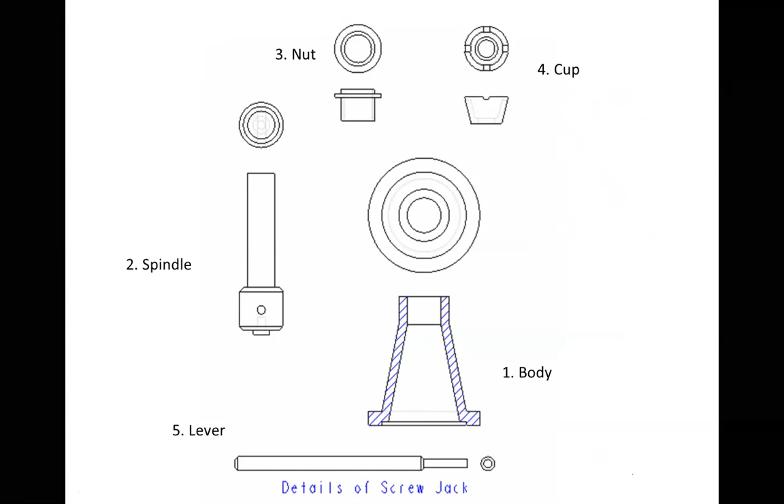So we have to draw the assembly of that. So understanding these parts is first necessary, so that after seeing this drawing we should understand how these parts are. This should come to our mind first.

So you can see here the 3D models of the different parts. This is the sectional view of the body part, a full section is shown. This is the complete screw jack body, in which you can now easily imagine this nut will be fixed here. The collar is here, it will be placed at this position.

After that, in this threaded part, this screw will be fitted. Then above this screw, this cup will be placed and tightened here. And in this hole, this lever will be inserted.

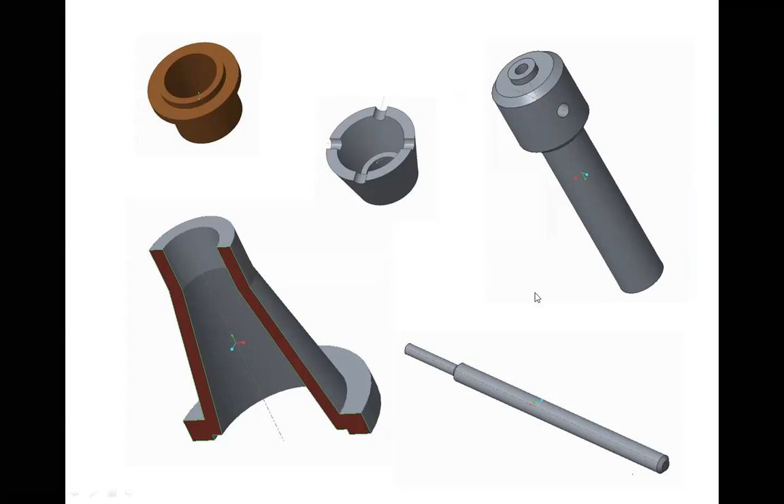Now you can see the fitting, so you can now easily imagine this is the body part. Nut will be fitted here. Inside the nut, the screw, and the cup will be placed at this position. Handle will be at this position. So the idea will be very clear when we talk about the screw jack assembly.

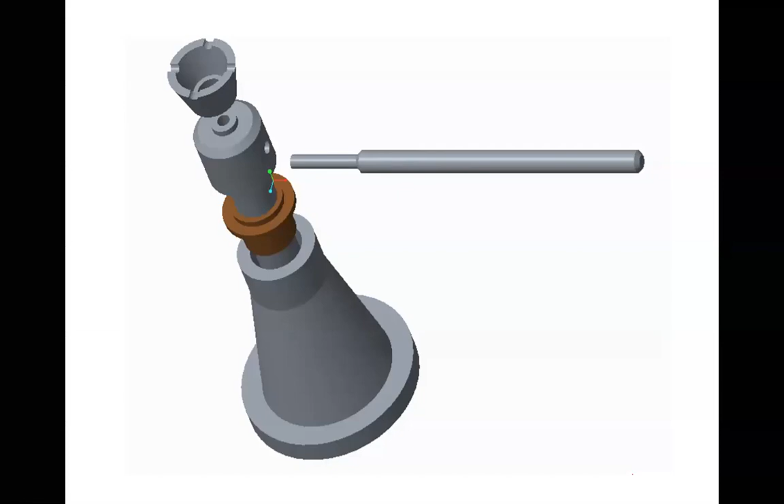So looking at this drawing, we should understand that these parts will get fitted like this - these parts are getting fitted like this. So you can see the screw jack assembly. So this is the assembly of the screw jack. Whatever details are there, they can be visualized, and after that you can have the proper place. This screw can be at any height.

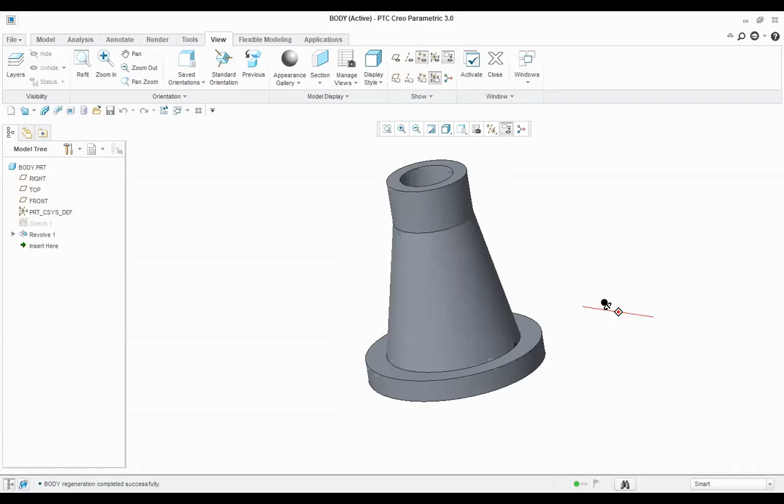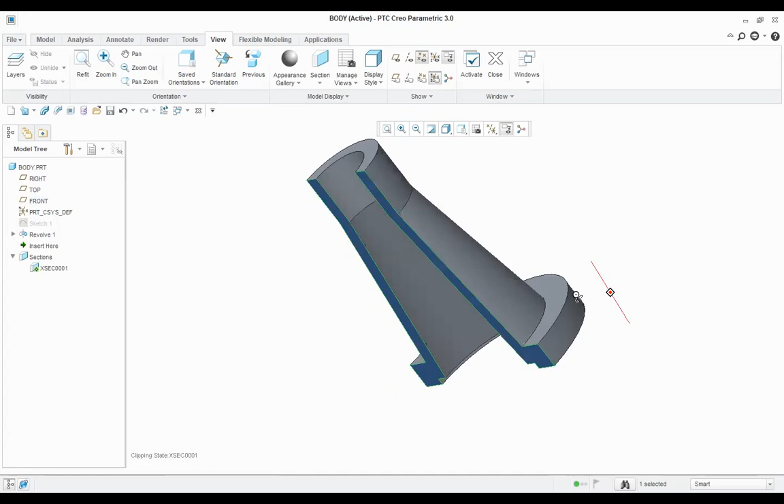This figure explains the 3D model of the body part - a body part, okay, so this is the body part. It's symmetric, and you can have the sectional view of this so that you can see the detail. See how the sectional view looks.

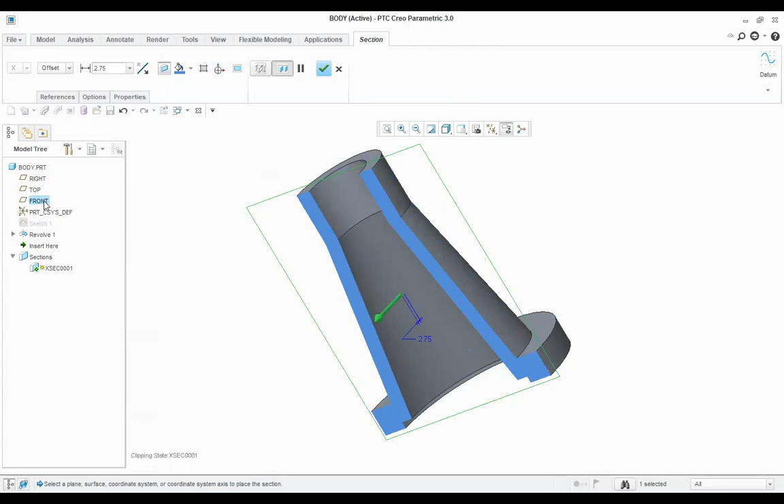And if you don't take the section, what will happen? If the section plane changes, the sectional view also changes. So it all depends on where we are taking the section. If you are using the section, you can have the sectional views; otherwise, you can see completely the detail of this.

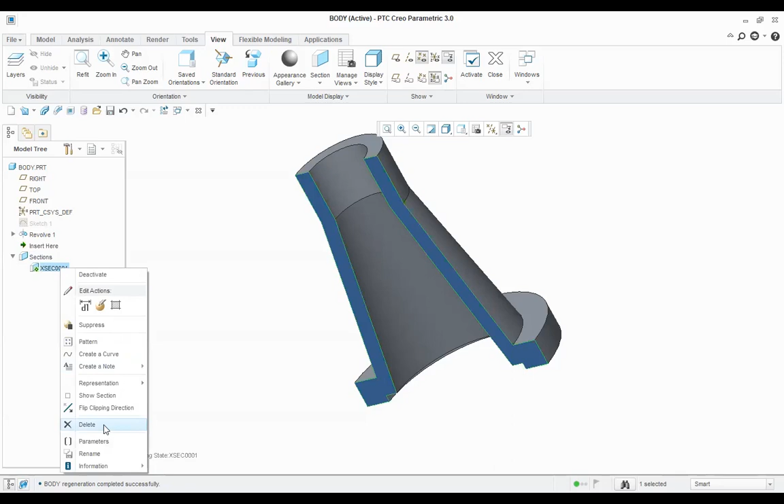So this is the first part. Now the second part is the nut, cup, spindle - any one. So this is the nut part, which is - this is the nut part. This is having internal threads, this is having the internal threads.

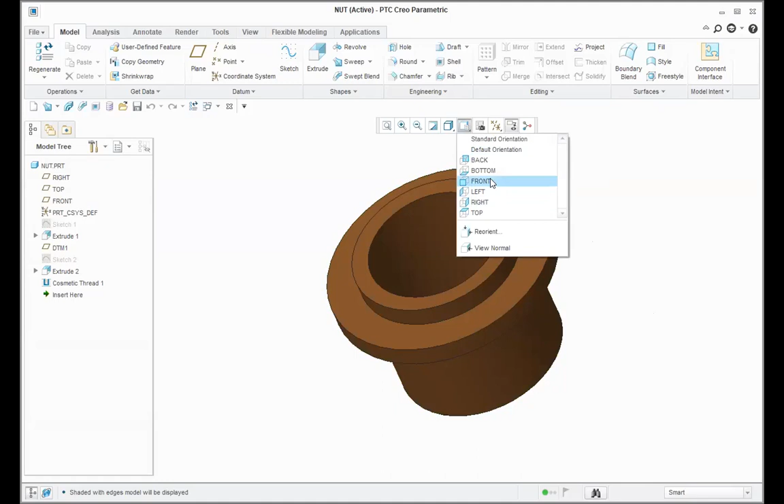Now for this, if you see the front view of this, this is the nut part. And if you have the wireframe drawing, blue line indicates it is a threaded part. And in the top view, you can see the circles - these are the different circles. Very easy to understand. This drawing is given front view and top view.

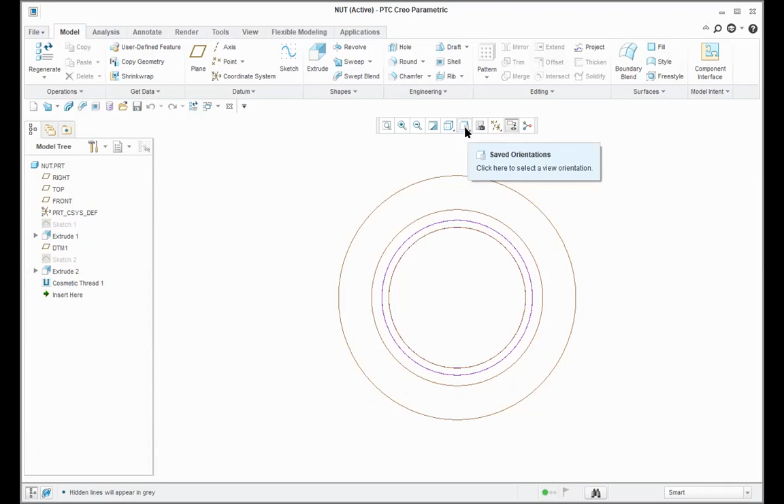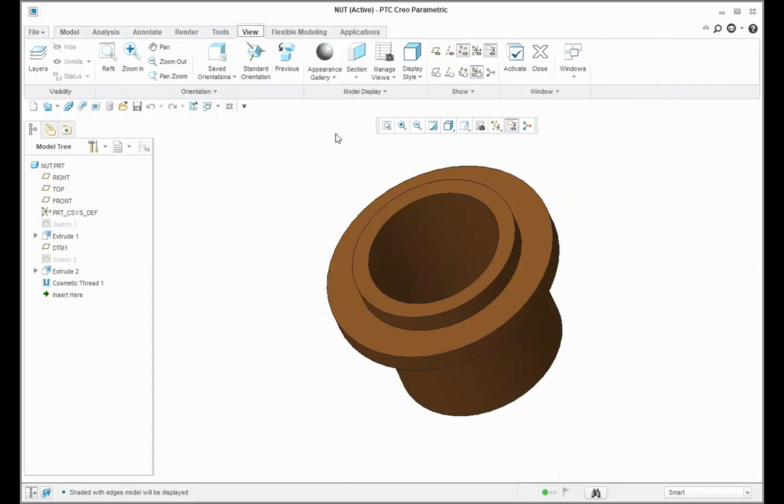This is given to you for the nut. This is the front view. So this is given, so from this you can very well imagine the nut drawing. So this is the nut - internal threads are there, this is having the internal thread. If you try to see this in sectional view, things become very simple. So this is there, the nut can be having this position.

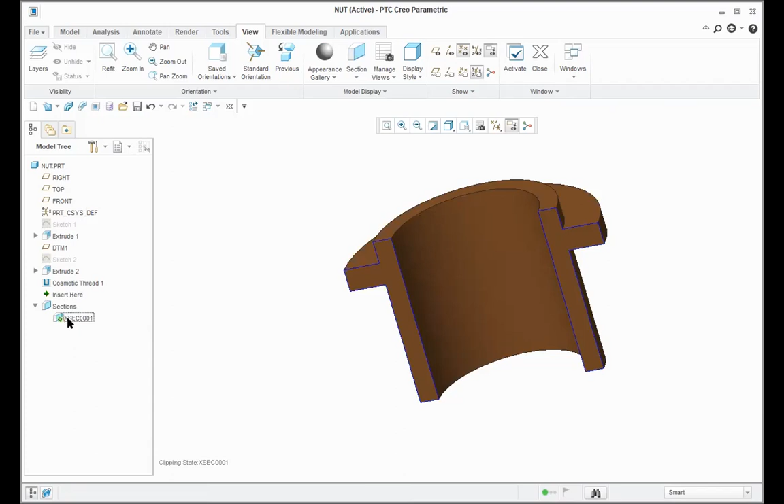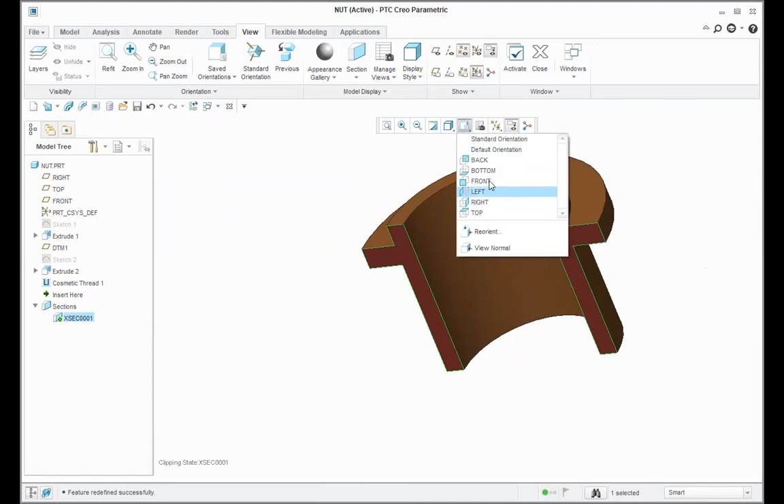You can have the sectional view to understand easily how the sectional view will be working. So it is like this - a very clear concept of sectional view. This nut's sectional view looks like this, see - only this much material gets cut. And you can have the sectional view.

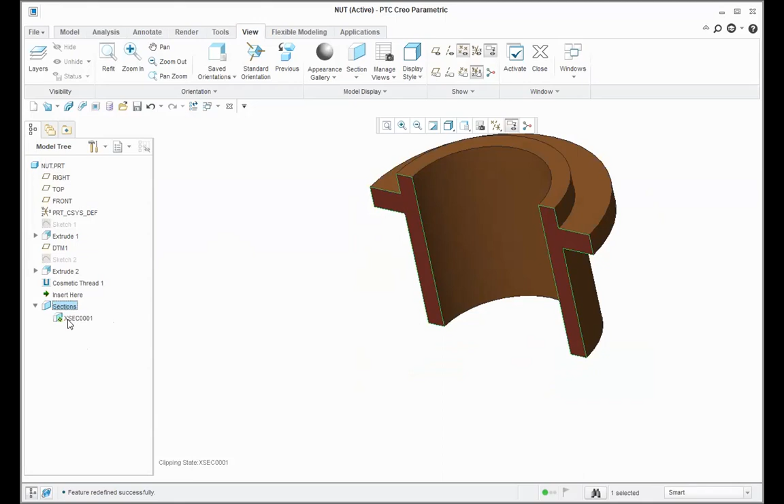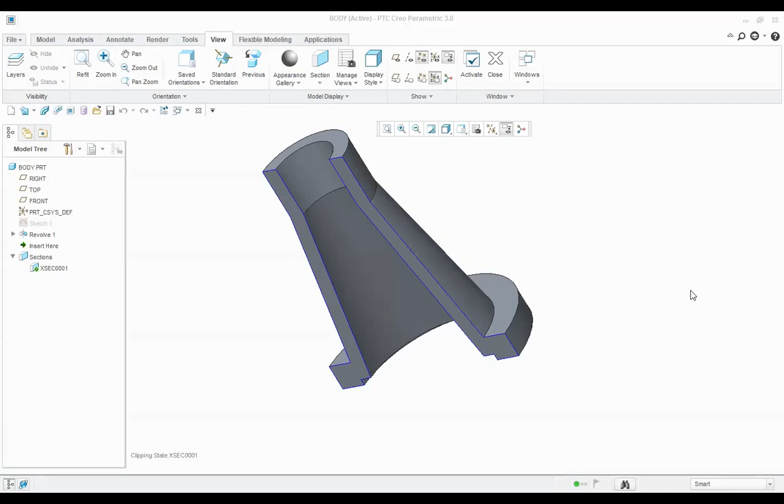So if at all required, you can use this concept also, wherever necessary. If not required, you can show complete detail of this part. In the same way, we can observe the sectional view of the first part - this is also there. You can observe the sectional view of this, or if not required, you can delete that also.

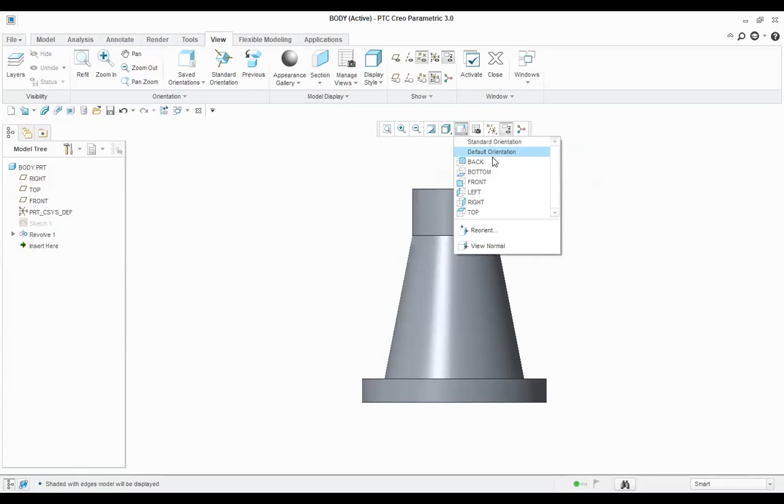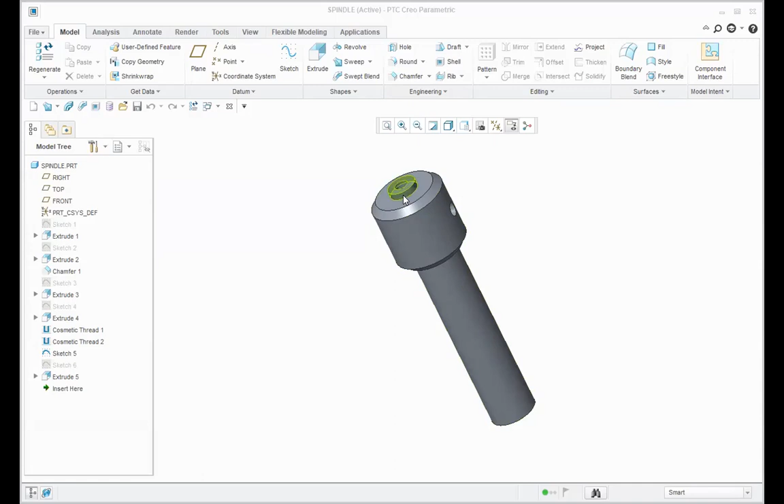So this is one part. Another part is the spindle part - the spindle part is having the external threads, this is the spindle part. Now this spindle part is fitted with the nut. Upper part gives the place for the cup, and this hole gives the place for fitting the lever. So these are the different parts of the screw.

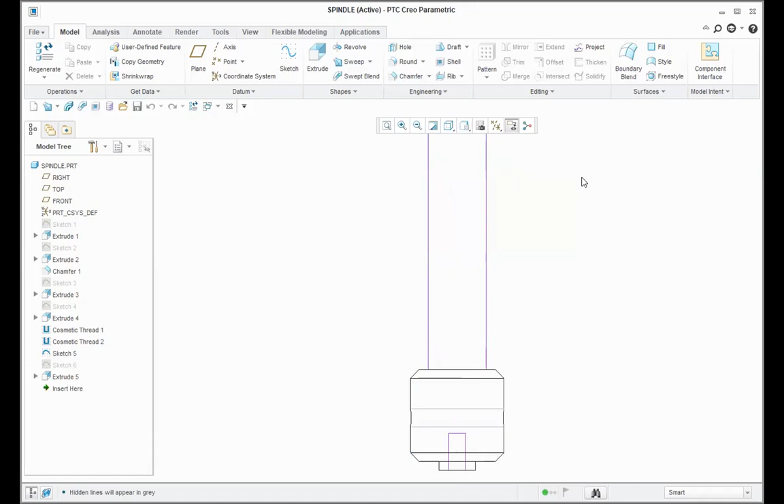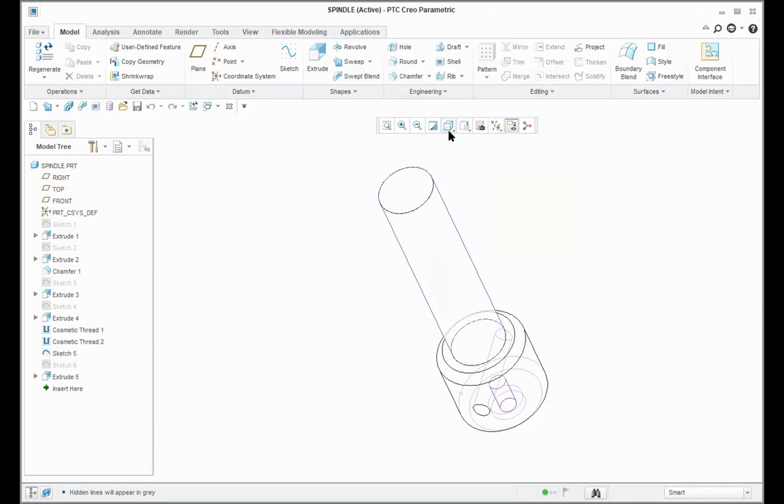So we can have the default orientation of this and the shaded view. So you can have the shaded view of this. Very easy to understand the screw part. So this is the screw part.

One more part is remaining, which is important, and that is the cup part. So the cup part is basically providing the bearing.

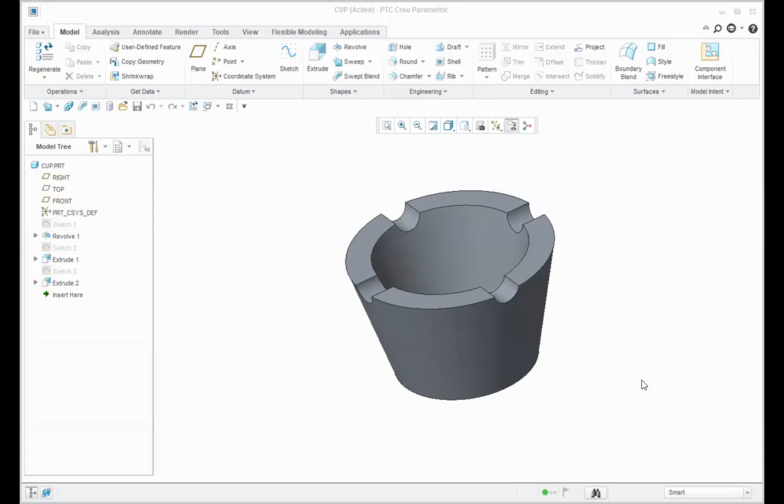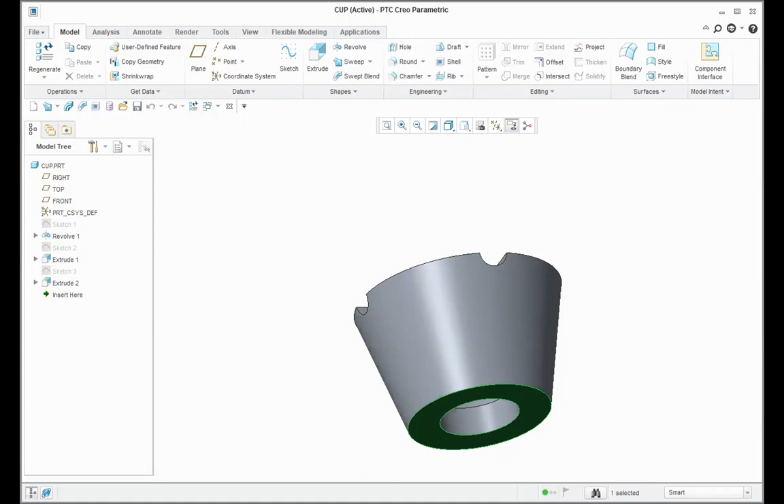This surface of yours, this surface, that is getting rested on the screw, head of the screw. So after that it will be fitted.

There is a hole in it, see, like this. This is the hole. So here also you can see the front view of this. This is the front view.

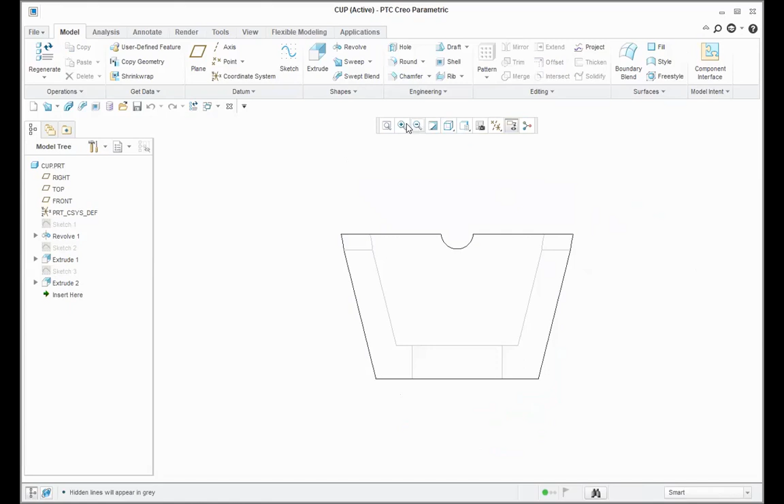See the diagram. This is the diagram which is showing us the front view of this cup.

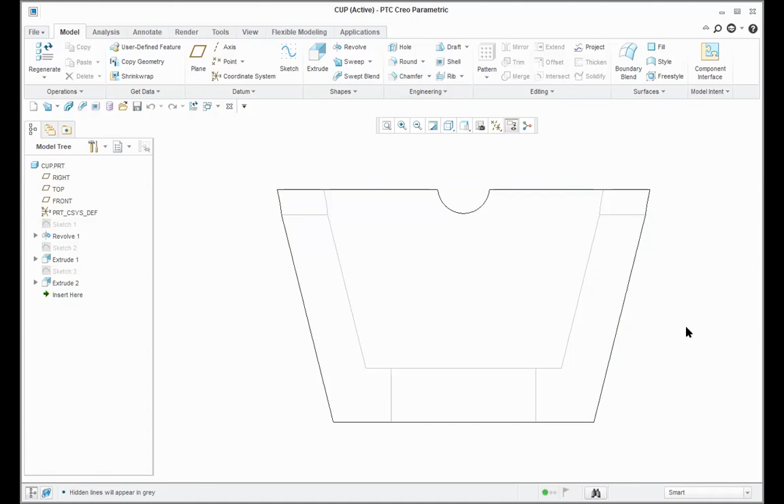If you see in the shaded view and the wire drawing, so in the wire drawing frame, top view - this is the top view. So very easy to understand.

The part has a cup shape, tapered. So this is the part.

So this software is very much helping us to understand the concept of assembly and details. Just as we saw the complete intersection, the assembly detail concepts of this chapter also become very clear.

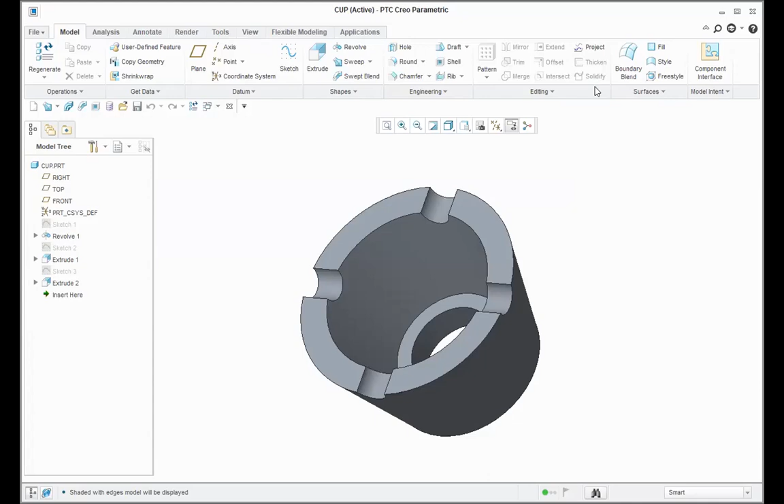Now one more part is remaining, and that is the lever part. So this is that part, lever.

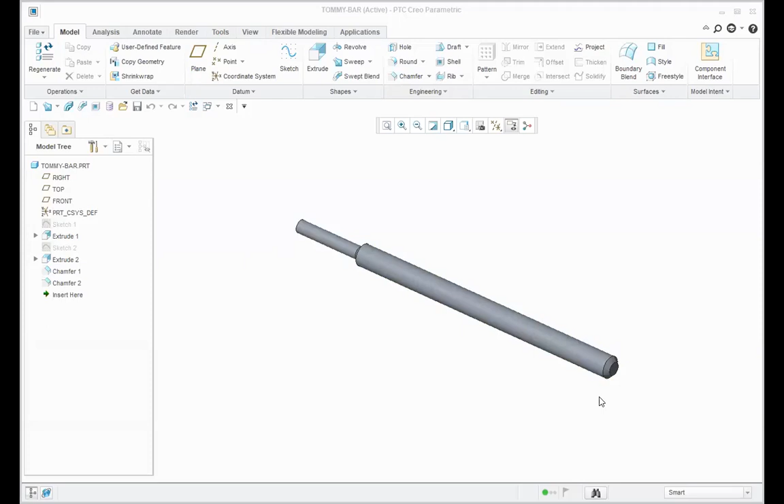So from that we can easily understand. So this is the part which is used in the assembly. So from that we can very easily draw the drawings.

One more drawing is remaining. Now we will see the assembly of this. So how the assembly is there. So this figure, it will show you all the parts, they are in their position.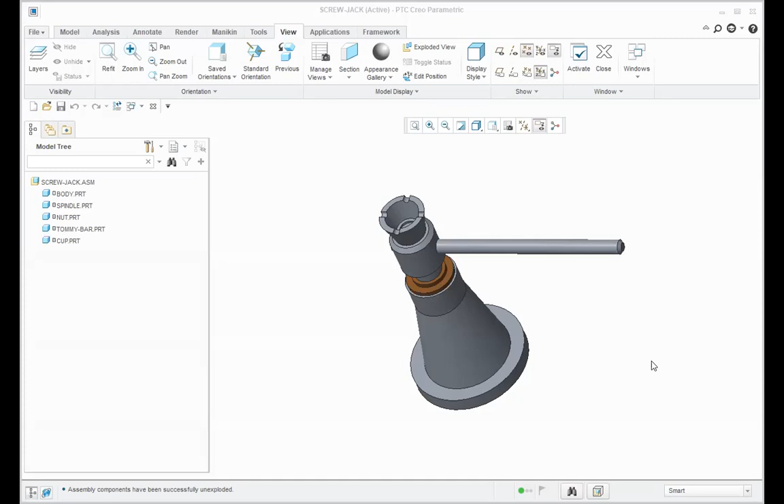All the parts, they are placed in their position. So here you can see very easily all these parts, they are shown in their position.

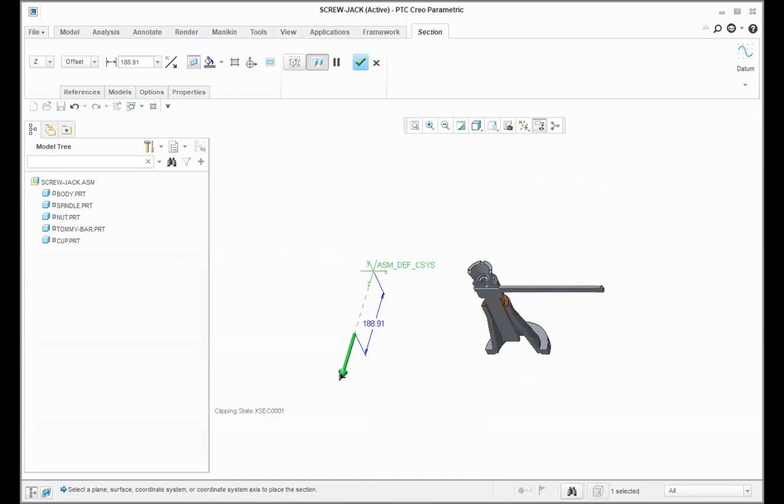So this is there. If you see the section of this, so you can see here this part. In the section you understand which parts are fitted how.

So this is the body and in that the nut is fixed. The screw is in it, the cup sits on it, and this lever has gone into that hole. So this is the importance of sectional view.

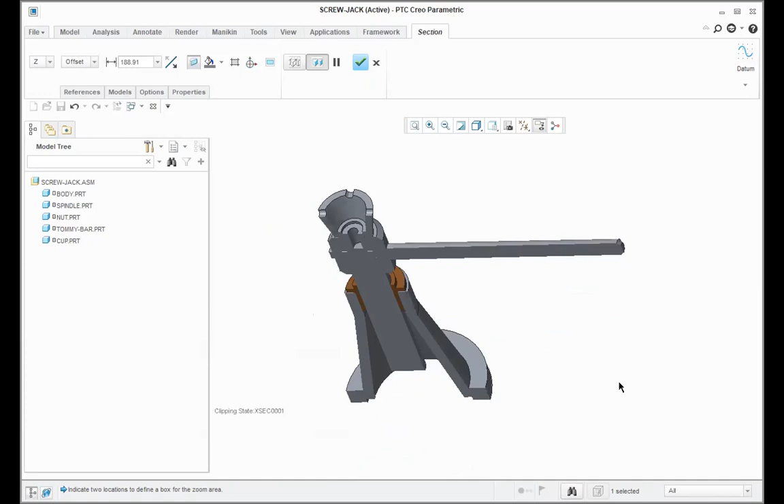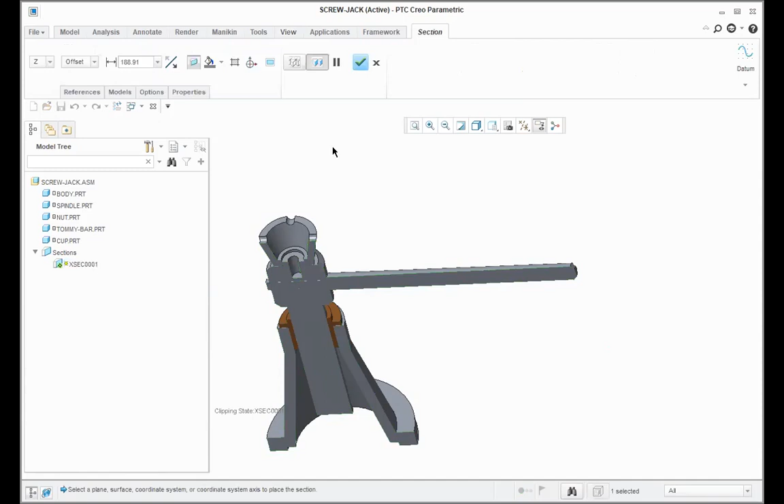So that is there. So this part is getting details of the part. So here these are the parts and how they are fitted. You can see here how these parts are fitted.

This figure will give us a clear idea about the fittings, how all these parts will fit - we understand that from this. In fact, individually also we can check.

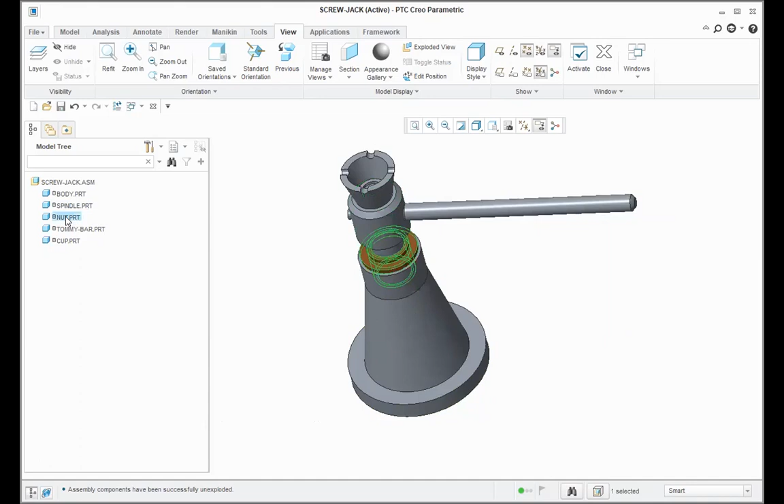Now suppose that this is the nut part, sorry, spindle in nut part. This nut part, see how it will fit. So the nut part is getting fitted like this, it will sit into this. So it gives us the idea - nut part, it will be fitted like this.

I will maximize this figure, and from this you can easily understand. Yeah, it will rotate like this. Okay, this will be lifted like this.

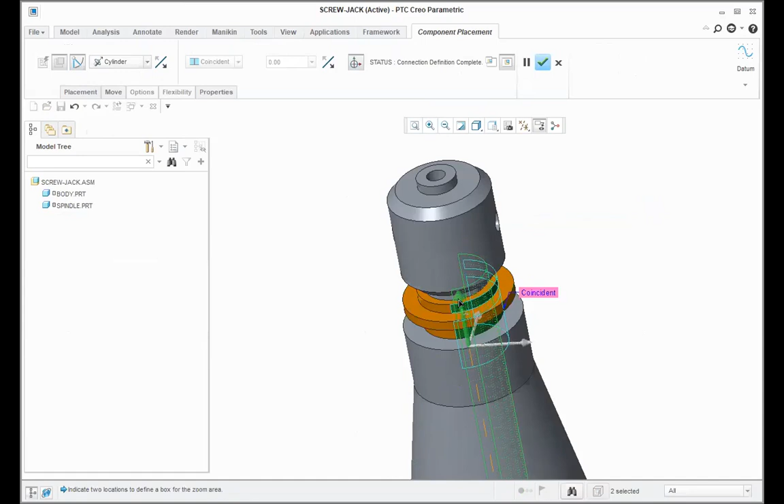Similarly, spindle part - this spindle part, see how it fits, like this. This is the spindle part. At the same time it can rotate.

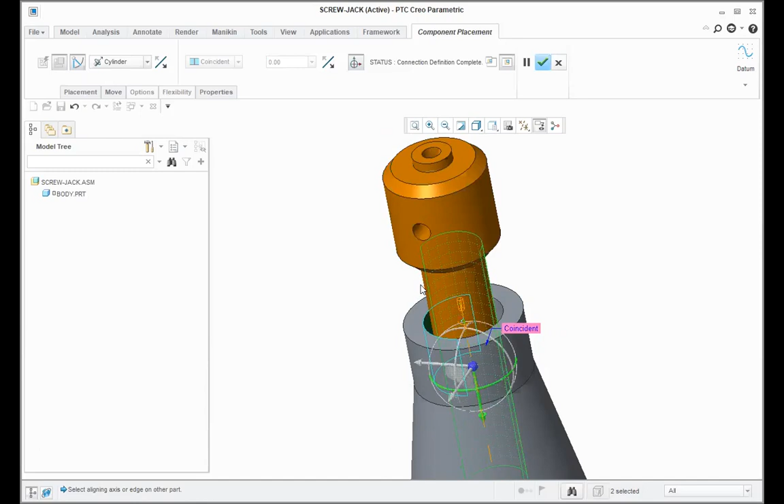Now after this, Tommy bar - see how the Tommy bar is. So it can work in this way, a Tommy bar. It can be fitted.

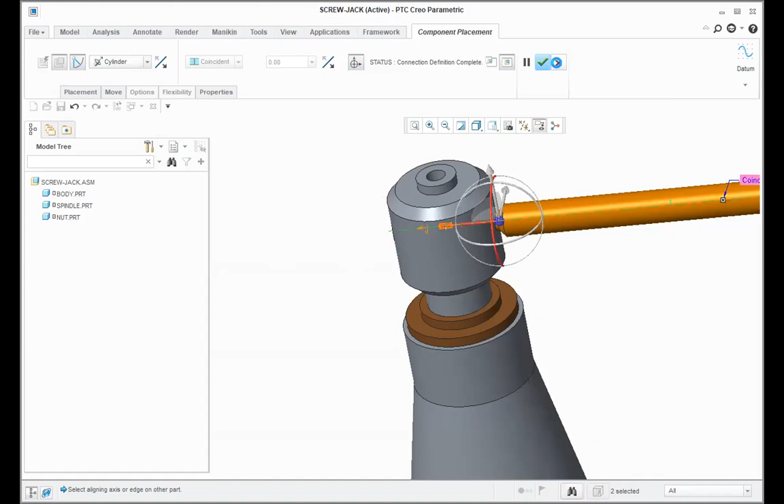This is a small diameter, it can only remain this much, not more than this. It can be fitted like this. Now after that, one more part is the cup part.

One more part is the cup. This cup part, it will be fitted like this, it sits on this, and it can rotate. So these parts fit this way, we understood that.

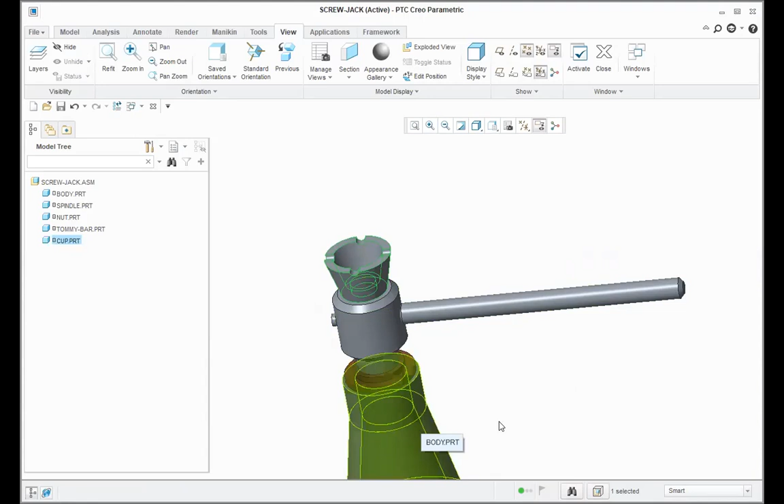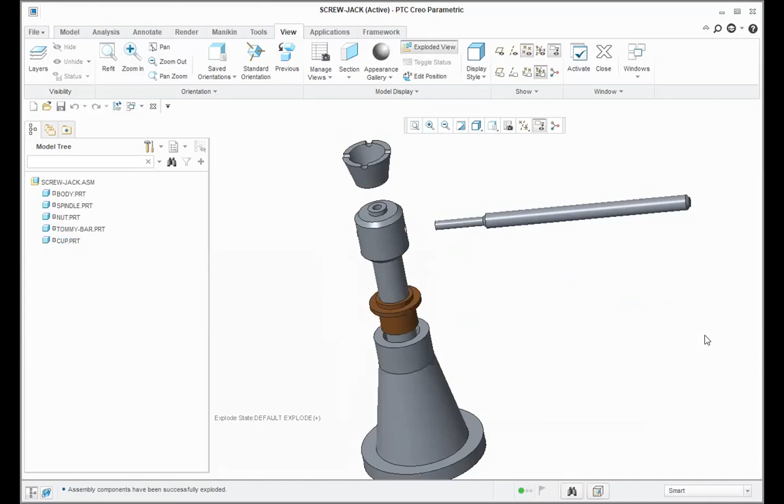So this assembly is showing us the various positions of the screw jack. This is the exploded view, which explains how these different parts are fitted. Similarly, this is the compact view - this is how this part is.

Now we will see one more part of this, the drawing part, how this drawing is drawn. So that I will also show you.

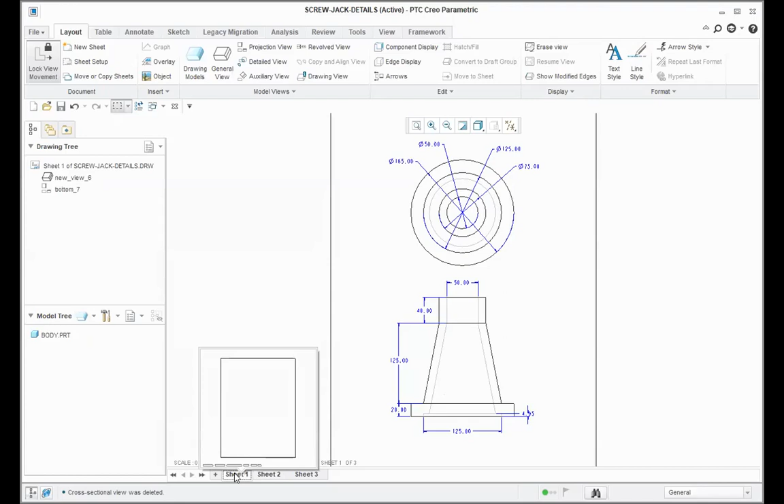So here, this is the body of the screw jack, and this is the front view and top view of this. And this is the screw jack assembly and detail. So this gives us the clear-cut idea how the different parts are activated.

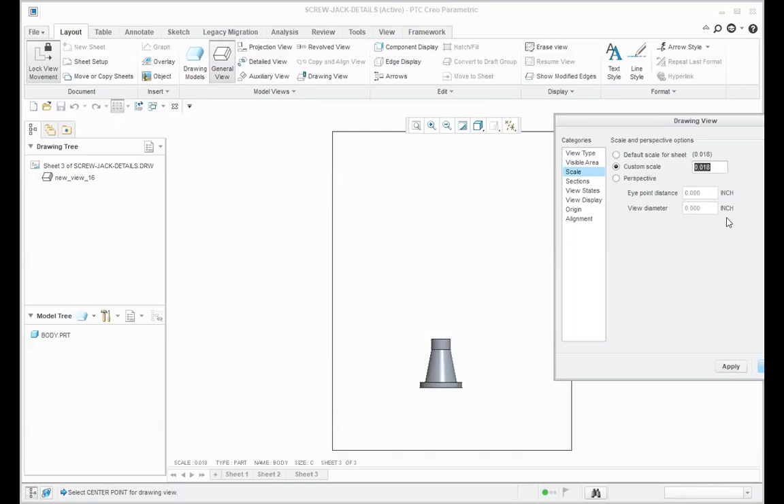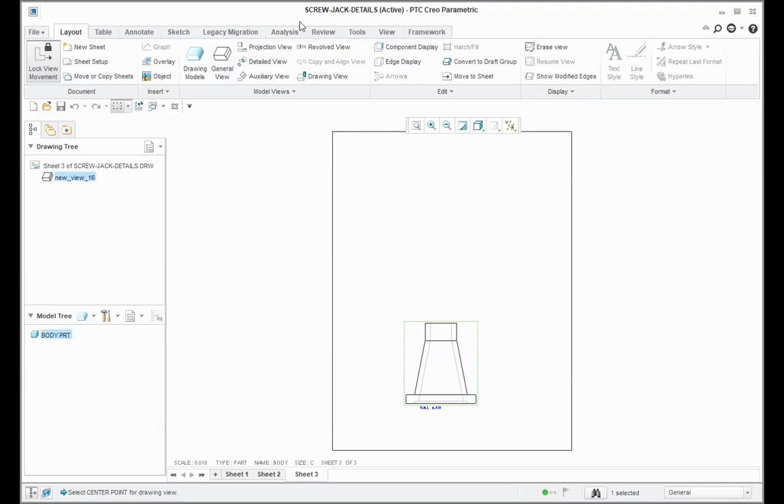So very easy, it is the front view. You can have a different scale of this - for this, you can use any scale so that our figure is enlarged. You can use wire drawing so that the part will be according to conventions. Once this is drawn, drawing the other view is very easy.

The second view - nothing much needs to be done. Now how this happens, when 3D modeling is done in a correct manner, drawing this front view and top view, all that becomes very easy. This is only for understanding purposes.

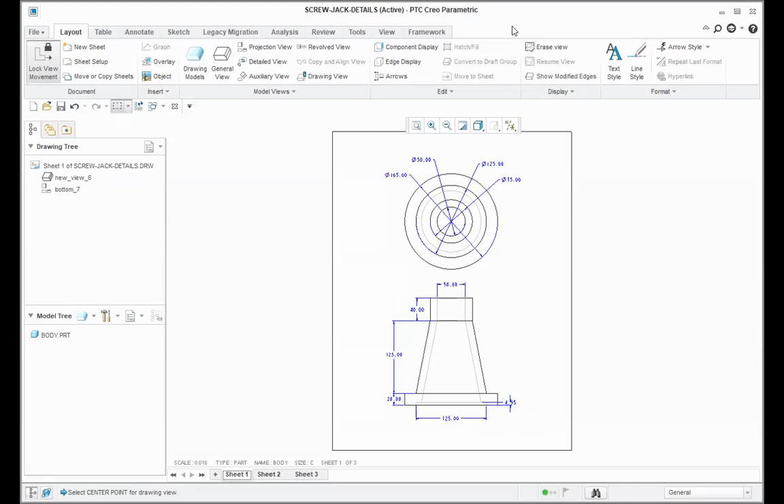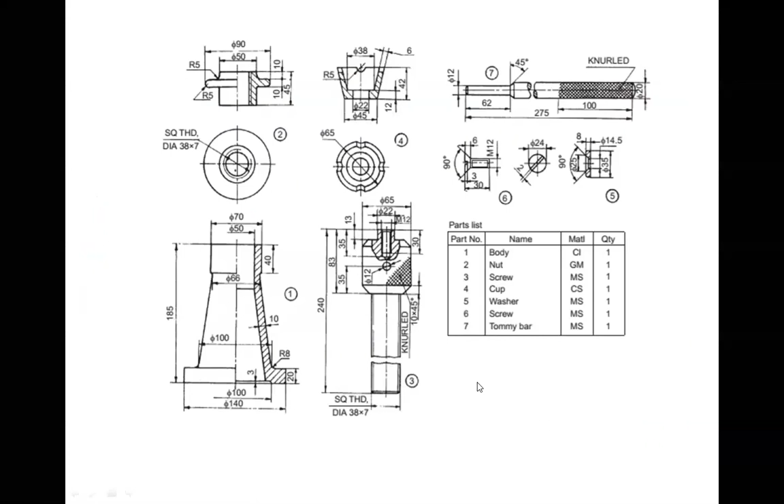So from that, we are having the idea that this front view, it is possible to have the details of this, and from these details we have to draw the assembly. To draw the assembly from these details, we must understand how these parts fit. From that, we understood how the parts are and how they will fit. We need to draw its front view and top view.